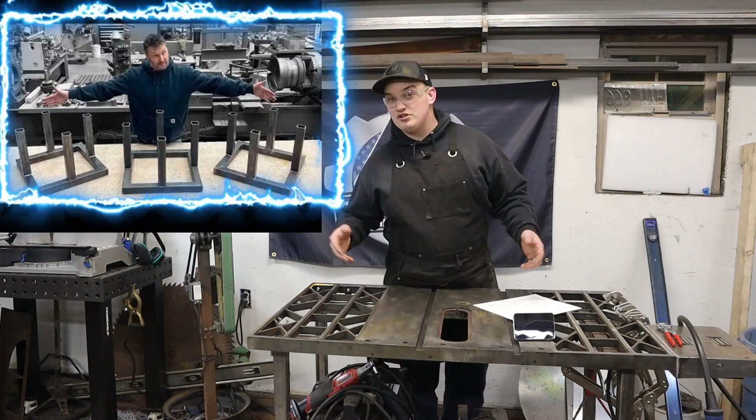Now, a little bit of background on this challenge here. Jason from Fireball Tool did an experiment a couple months ago where he sent out a part that he designed to multiple different weld shops to see what kind of results he got and to showcase the challenges of fabricating things without a fixture table, and specifically his fixture tables that he's designed over the last couple of years.

So I thought it would be fun to do this challenge myself on my budget-friendly fixture table, and Jason himself said, and I quote, 'I'd like to see you guys try something like this,' asking somebody, can somebody just build me a box, please? Just like this. So we're gonna try to cater to that request and see what kind of results we can get.

Now, I'm not trying to knock his fixture tables in any way, shape, or form. I use them at my 9-to-5 job and I love them. They're super great tables. But I also think that there are some budget-friendly options and some techniques that can cater to good results. So I'm gonna show you how I go about doing this, and we'll see what kind of results we get.

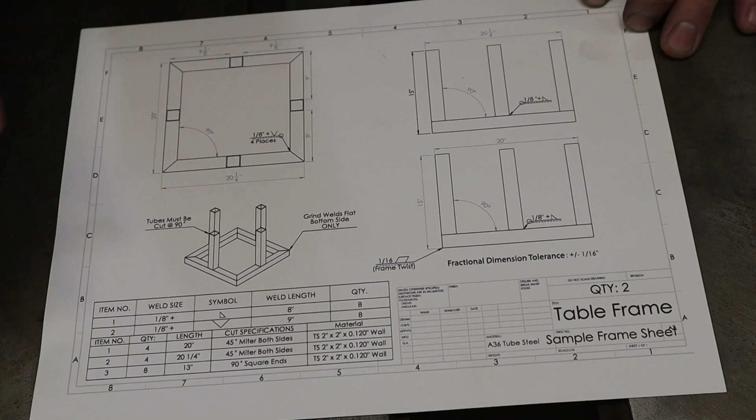Okay, so I printed off the plans here for the challenge. He has these readily available on his website, and we're just gonna kind of go over what they are. So we've got a cut sheet here.

First off, we've got 2x2 120 wall material that we're gonna use. He's got dimensions. So one thing to notice is it's not a symmetrical square. One leg of the table here is a 1/4 inch longer or wider than the other one. So we have a 20-inch length here and 20 1/4 here.

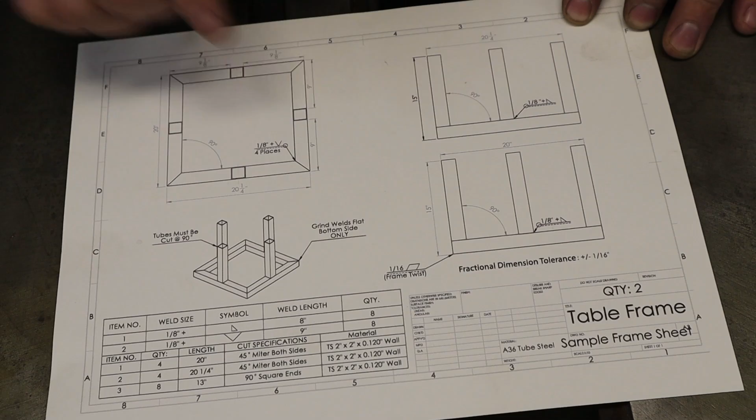Other things I noticed is he has welds called out. So he's got bevel grooves called out for mitered corners. So he also has mitered corners called out instead of just a square end. And then he's got fillet grooves, 1/8 inch plus on both of them, called out on the fillet welds there.

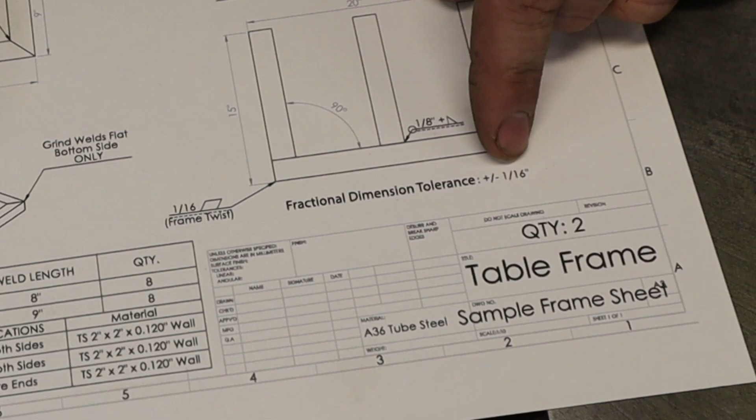The other thing that we notice is we have a quantity of 2, and we have a tolerance of plus or minus a 1/16 of an inch, and that's going to apply to both the squareness and the flatness of this part.

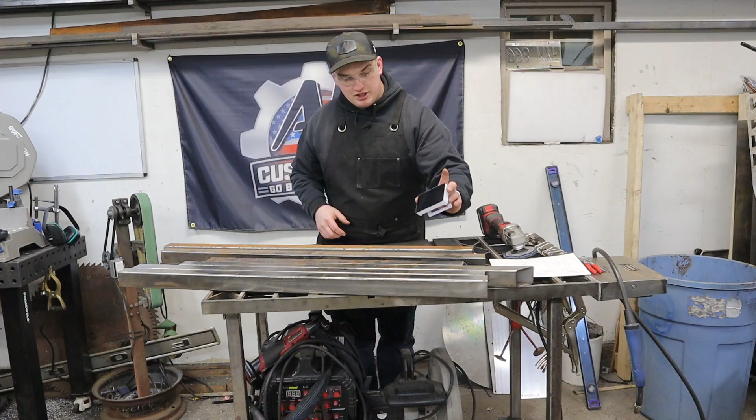Okay, so I got my scrap material here that meets the print's specifications, and we're going to get started with this. One thing that Jason did mention is the importance of knowing the time frame that you're going to do this project in, and I totally agree. Especially if you are planning on making money on a project, the least time possible is going to be the most profitable, obviously. So I'm going to set up the stopwatch here, hopefully it works.

I'm just going to set this in the background of most of the videos so that you can kind of see where I'm at and the progress that I've made at a certain time point. I'm not going to run this video that whole length. You're just going to have to trust me that I didn't edit and cheat.

The other thing that I'm going to do that's just a little bit different than the way he did it is I'm primarily a TIG welder, and I'm going to TIG weld one and MIG weld the other one just to kind of see what the difference is, see what the time difference is, and see if there is any noticeable difference in distortion or anything like that.

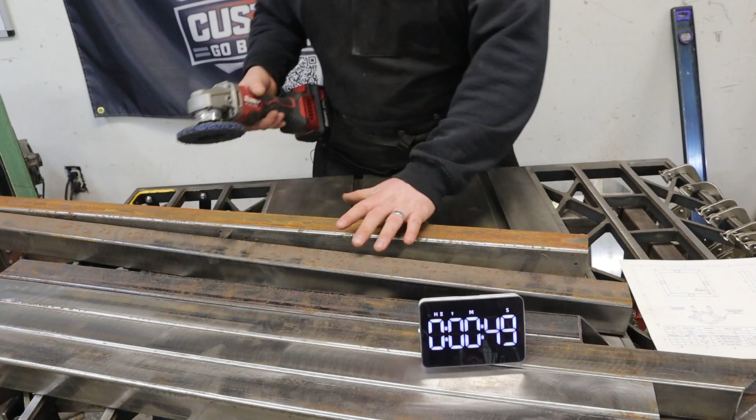So most of my material is clean, but especially since I'm going to TIG weld one of these, I'm going to clean up this last piece here that's got a little bit of scale on it, and I really like these strip discs. They remove the surface rust without grinding into any of the parent metal.

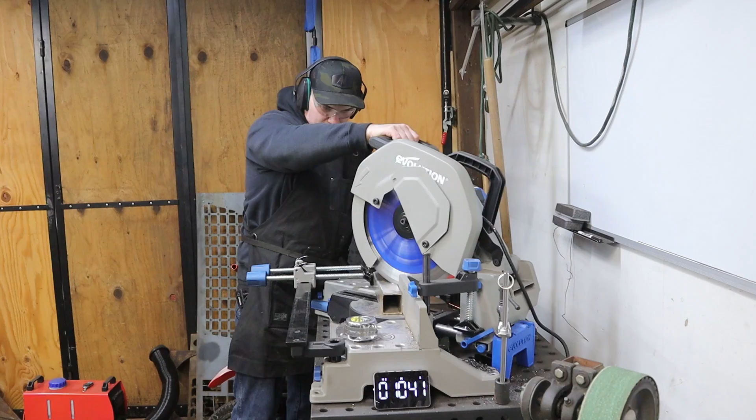So a quick little trick that I use to improve efficiency and accuracy whenever I'm cutting out miters is what I call the miter saw to fence difference. Now, I go over this tip in my top 5 chop saw tips, go ahead and check that out later.

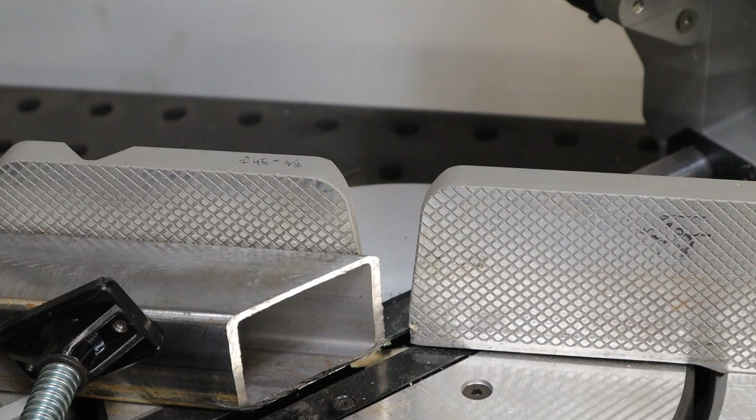But in essence, a lot of times you're measuring your distance, let's say it's 20 inches, and you've got a line, and especially if that tube has a rolled edge on it, it's really hard to get down there and see exactly where that line translates over the edge, especially in this dark corner. So what I've learned is we chop off a quick little sample here. Then once your part is cut, you leave it in the clamp, and measure from the end of your miter to the edge of the backstop.

In my case, at a 45-degree angle, this saw is 5/16 of an inch. I have it written down here just so I can remember that. So if you wanted your piece to be exactly 20 inches, you would measure it to 19 and... that would be 11/16, minusing 5/16 out. So 19 and 11/16 -- let's say our mark was at 19 11/16 -- it's going to be perfectly in line with the edge of your backstop.

So instead of having to look down at the edge, you have a straight-on reference that you can make really accurate. Now, if your saw lands on an odd number like 5/16, which is kind of hard to do quick math with, another way you can do this is do the same thing, do a test cut, leave it in the clamp.

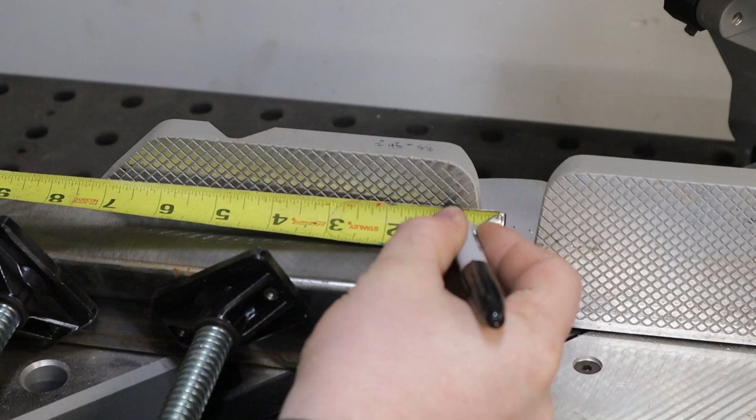Then measure from the end of your miter 1 inch back. Then you know that whatever dimension you are using, we'll run a line at 1 inch and then onto our tube. So in this case, if we wanted our tube to be 20 inches, miter to miter, tip to tip, we would know that we could just make a mark at 19 inches. We could line it up with our mark on the fence. And by doing that test and making that mark, you only have to subtract by 1 inch, which is really easy.

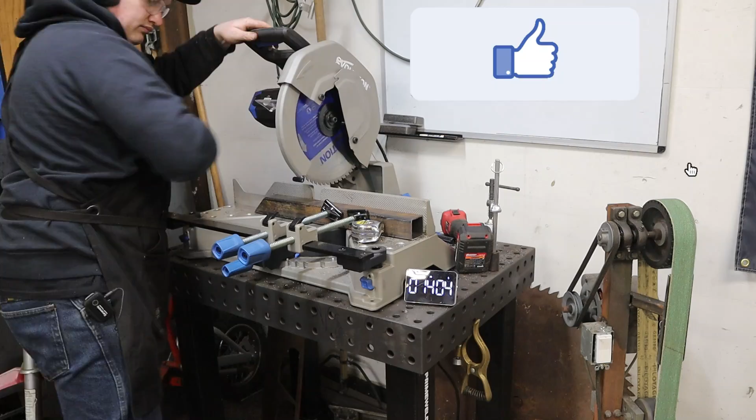Okay, so I got everything cut up and stacked over here. I stopped the timer so I can just kind of tell you about this table and the way I'm going to approach this real quick. It took me about 20 minutes-ish to get all that stuff cut out.

But one thing that Jason brought up, which I believe is very important, is to know the capabilities of the equipment you have. In application with this project, I know that these two wings are within 10 thousandths flatness across the two of them. Then if I get over onto this other wing over here, it bumps up and it's about 35 thousandths difference. So these pieces fall within the parameter of these two wings, so we're going to work off of this corner.

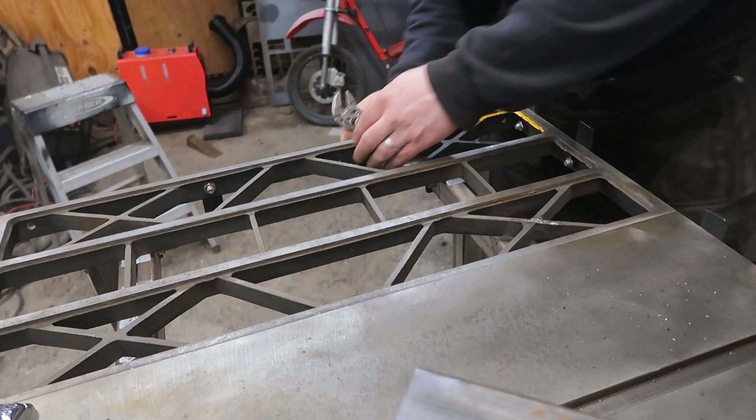As you can see here, I kind of have this corner marked anyways -- this is where I usually base squares off of. What I'm going to do is, like you've seen in my other videos, these are my work stops. I'm going to flip these guys up real quick, and we're just going to tighten them down. These are just little tabs that I have on here with hardware, and this is going to allow me to have an assortment of work stops based off of a square corner.

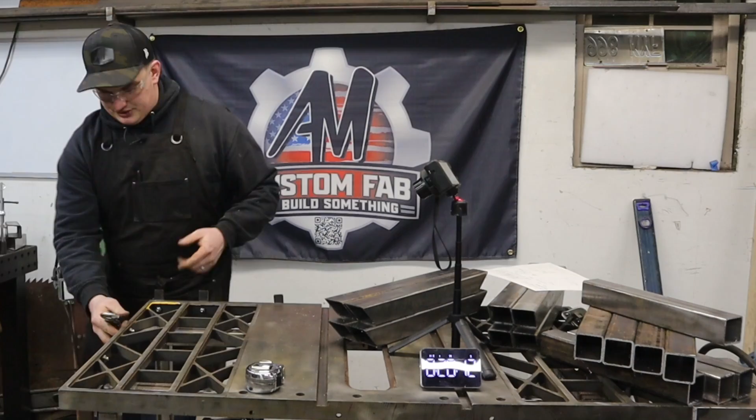Now I also know why I have this corner marked in yellow -- this is the truest corner of the table. So when I have a long square on the corner of this table, it's less than 5 thou of rock in that square. So I know that this is the best corner of my table, that's why I have it marked, just in case I move it around. I always know that this is the best corner to work off of.

Suppose I should start my timer since I'm working again. Sorry about that.

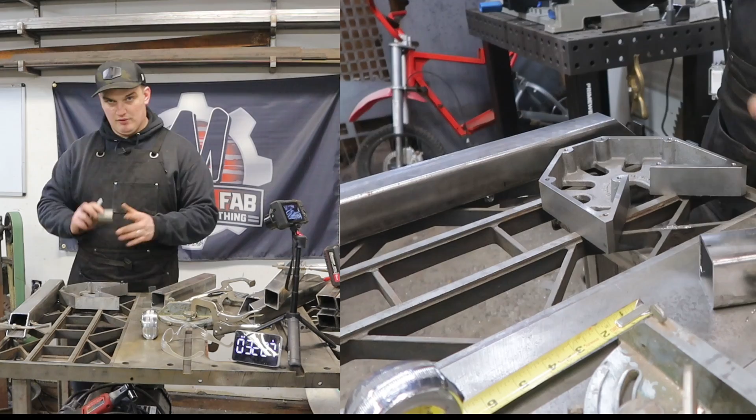And then we're going to throw a 1 inch shim block in here, so that'll make a total of 9 inches based off of the edge of our table here. So drop our shim block in, stick our mega square in there, and then we can clamp our mega square and our shim block to the tab that's on the edge of the table. It wants to pull up on me there, so I have to put a clamp on this side of it.

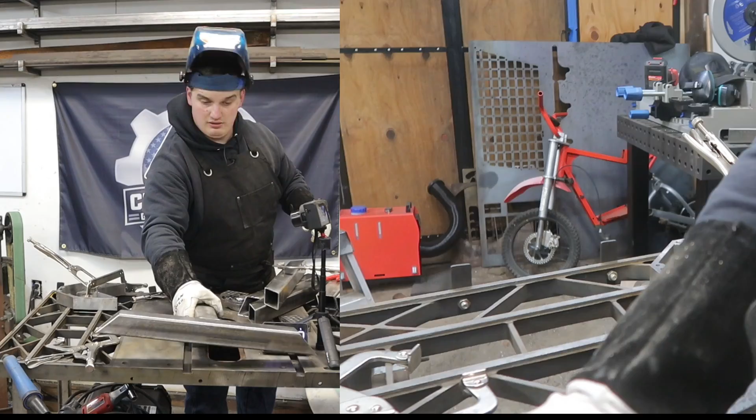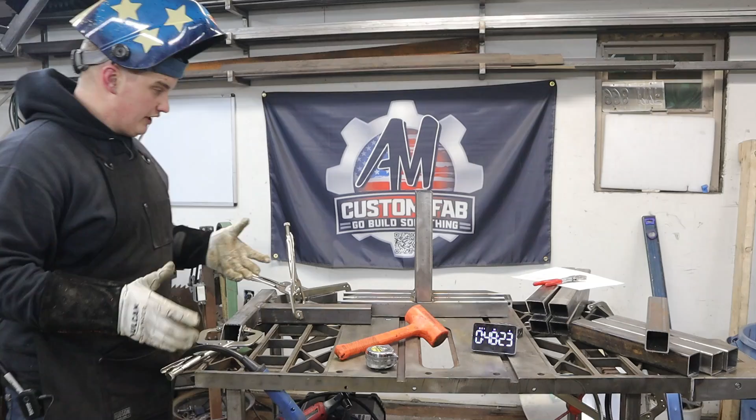Okay, so we're about at the 48-minute mark, 48 minutes and 23 seconds, and I'm going to stop it here. I'm gonna write that down on the table, because this is not my 9 to 5, and it's bedtime. Okay, so next evening we're back at it again.

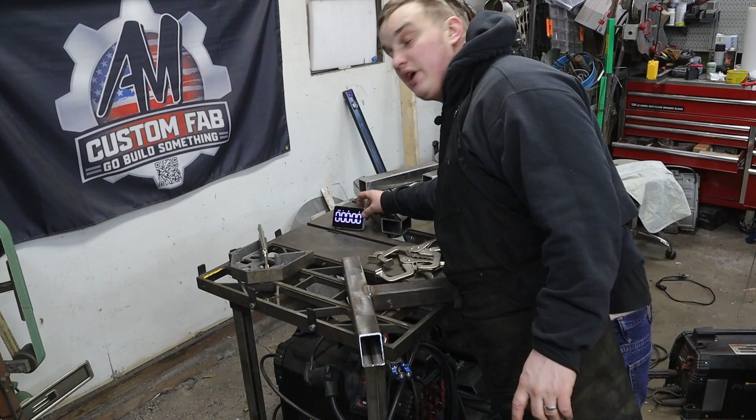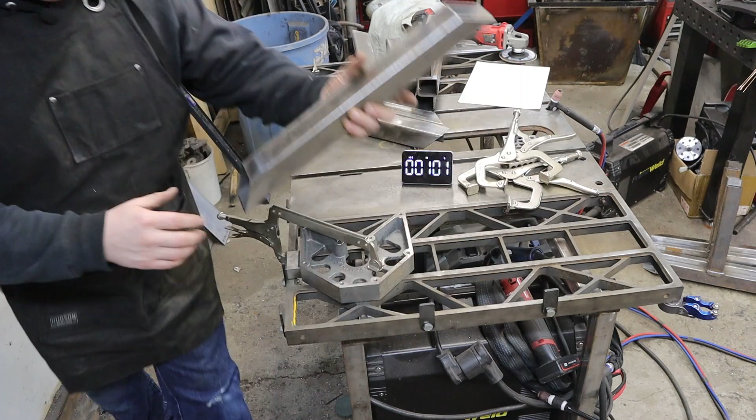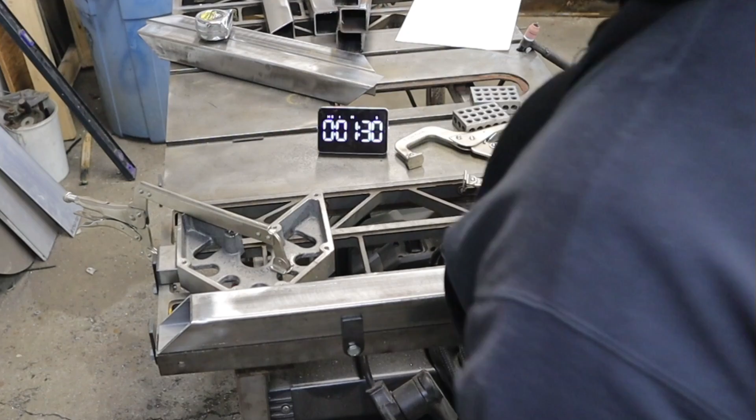We're going to start our timer. We got our one MIG welded up, and since the stop blocks are still set up here, we're going to utilize that and TIG weld that up, and then we'll assemble them together as tables. The right pieces are 20 and 1/4 pieces, so that's what our stops are still set up for. If you didn't see before, I'm basing this whole thing off the corner because I know the corner's square, and then I've got the Fireball shims here along with the Mega Square that is spacing me out that direction and holding everything true.

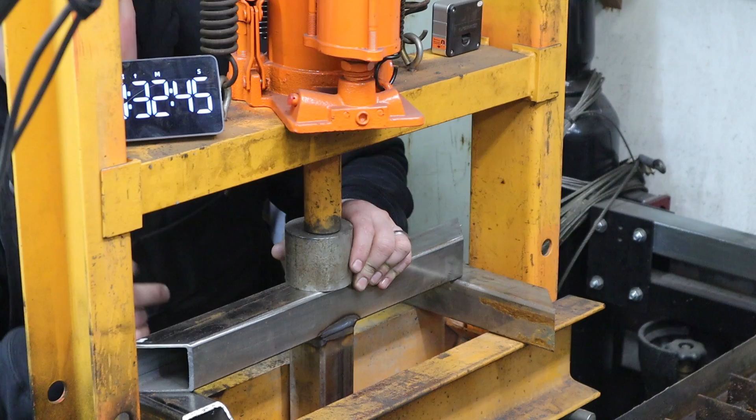And that worked pretty good, so we're just gonna zip through the other 7 of them, and I'll see you in a little bit.

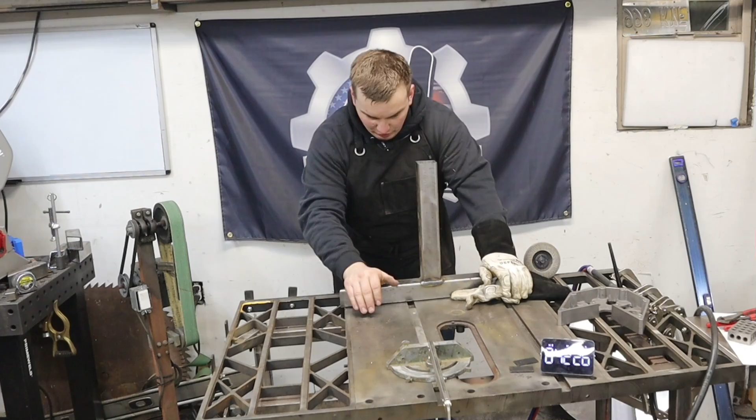Okay, so now that we've got these all flattened out, we've got no more rock on them here. And then if we go and stick our Mega Square on them, we're looking really true. So, liking that.

Now we can set up our table to square these out.

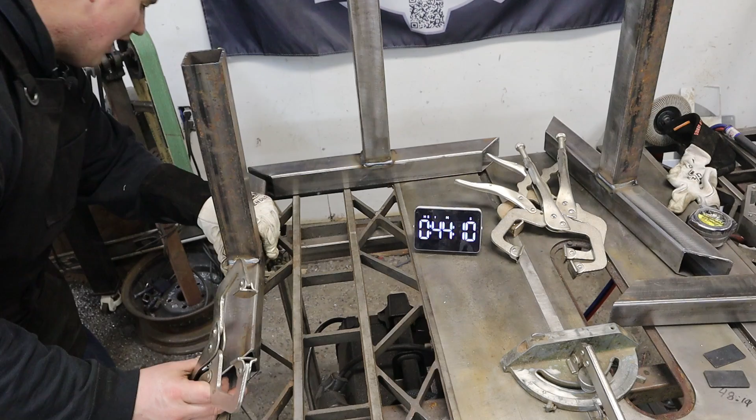Get our clamps, they're hanging on the side of the table over here. We're going to utilize these side tabs again, using the table itself to get right in the corner.

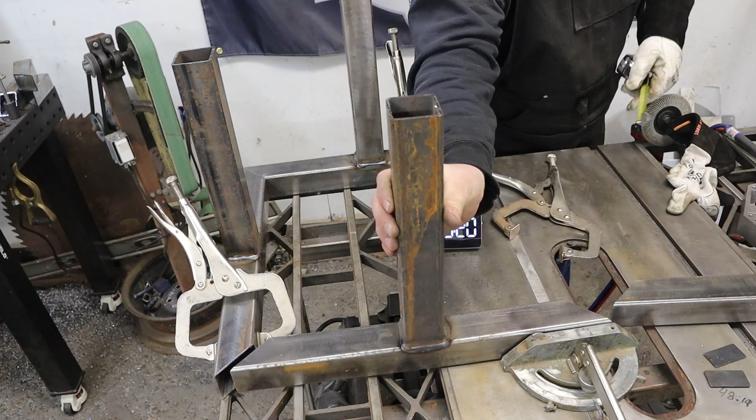Okay, so this end one here, I'm going to clamp it up against the miter gauge. And then this guy should slide right in on this side. But it's not, I put the wrong one in the wrong spot. And because I know I set that at 20 inches, I knew something was not right as soon as I stuck it in there. So, stick this guy over here.

Okay, so now that I've taken some measurements and got everything pretty much squared up, I'm noticing that some of these legs are wanting to kind of lean in on me when I have it all clamped down square. And I don't have the towers like Jason has on his table to be able to build off the table and up. Now, I could potentially take one of these wings and stand it up, square it up, and lock it down, and that would resemble the function of one of those towers.

But what I decided I'm going to do is take some raw material here, got some scrap pieces, and we're going to cut these down to fit and meet the parameters of the inside dimension of these legs. One direction we got 16, because we got 20 inches the other way, so minus 4 is 16. The other way we should have 16 and a quarter. So we're going to cut these down real quick, and we'll clamp these in between directionally, and that's going to help hold those tolerances while we weld that out.

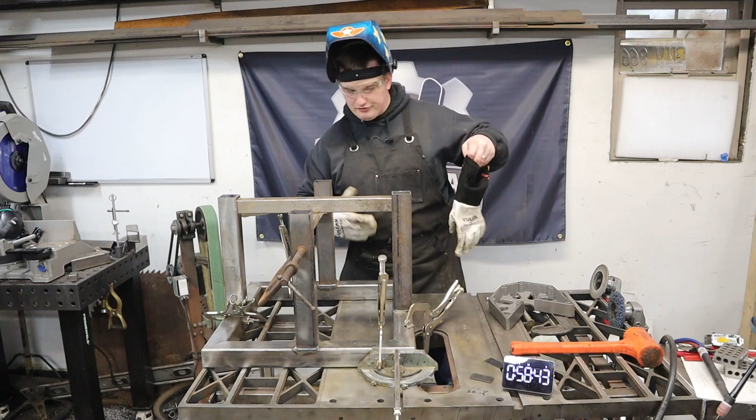This direction is our 16, which is this guy. Stick it in between the tubes here. And then this direction, confirm my length is proper, 16 and a quarter. Stick that one in here. I'm gonna go through and tack all the corners first, and then we'll go through and weld as much of it out as we can with it all fixtured up.

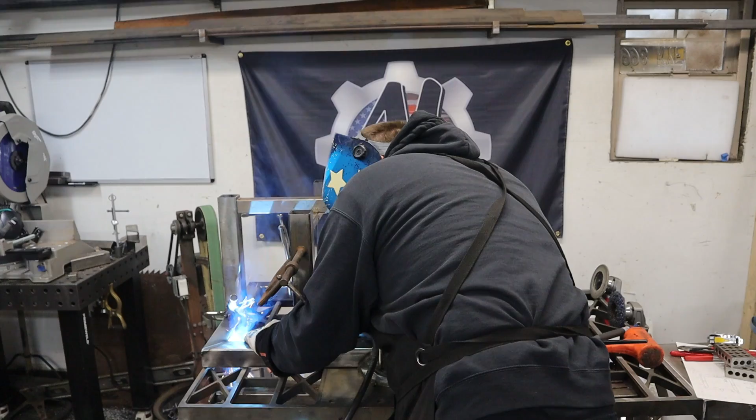Okay, so they definitely relaxed a little bit after welding because these things are not tight. If anything, they went out a little bit, which I prefer because you can always stick a clamp on them and kind of suck them in once you're done with that. But we also need to weld the bottom side, so I'm not going to suck these in until I weld the bottom side also, because it could shrink back that other direction once we start putting weld on the opposite side of this. So we'll check that out once we get to that point.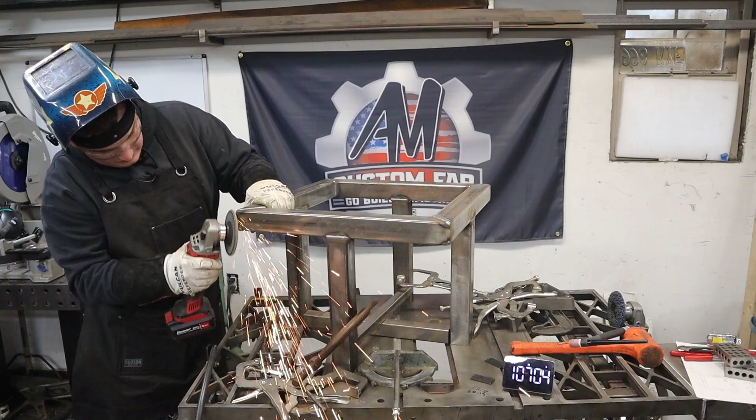So just a quick example, this is kind of the profile that I'm looking at to grind it down to. See how I left a little flat there so that we have room to fill that in. And this is what it would look like if you left it all sharp, and that weld's just going to kind of sit on top there, so it won't be as strong and it won't look as nice.

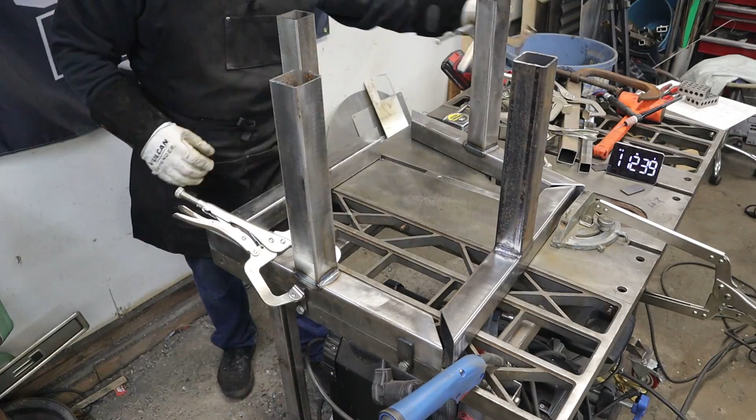Now if you wanted to go the extra step, the other thing you can do, if you have enough clamps, is clamp a piece of material to the side of these two tubes, and that's going to help ensure they're straight across or lined up, just in case you were slightly off center on your tube in relation to the miter. That's going to help line that up, but I think we're pretty good. We'll find out once we get it welded together.

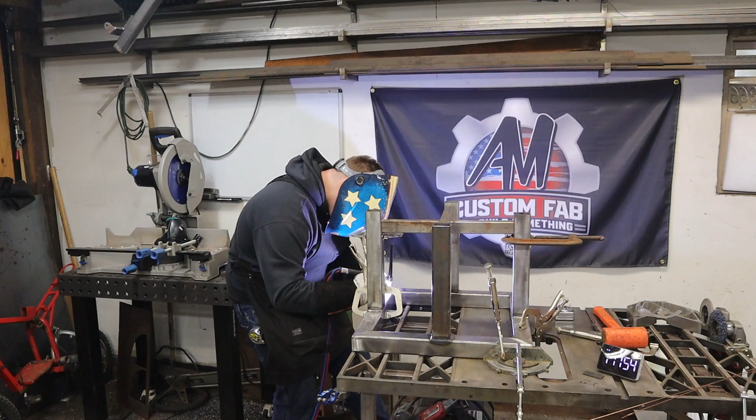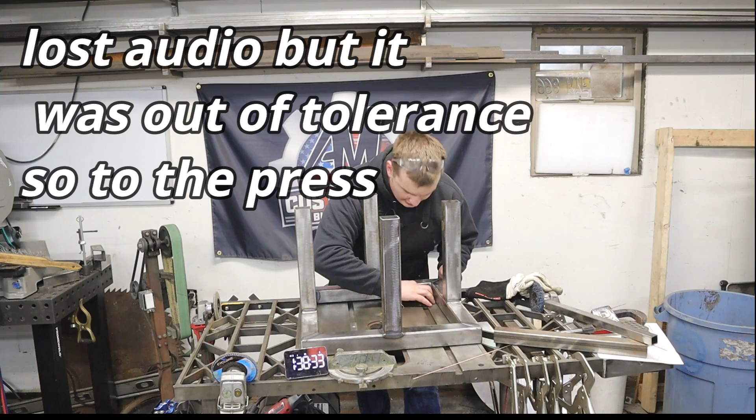These are our high sides. You want to push that down. Find a longer, more robust piece of material here. It's got some junk welded to it, but it should serve the purpose. Stack some plates on top of this one and let her rip.

I don't want to go too far, but I know we're going to have a little bit of rebound in the material. Let's see what that did. We are good and flat now. We've got no teeter in either direction. Feels really good.

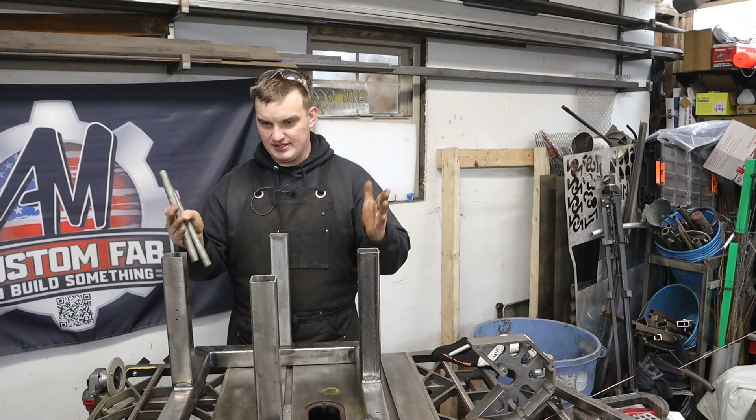Move it over here on this part of the table. I'm going to do that to the other one. We're going to clamp it down real quick, and then we're going to see about addressing the squareness of these and see if we can't true up the relation of these legs to each other.

Okay, and that did it. We got the teeter out of the MIG welded one too. It's pretty flat. There's a tiny teeter in it. It's a tongue twister, but we can't even fit the 32nd Fireball shim underneath of it.

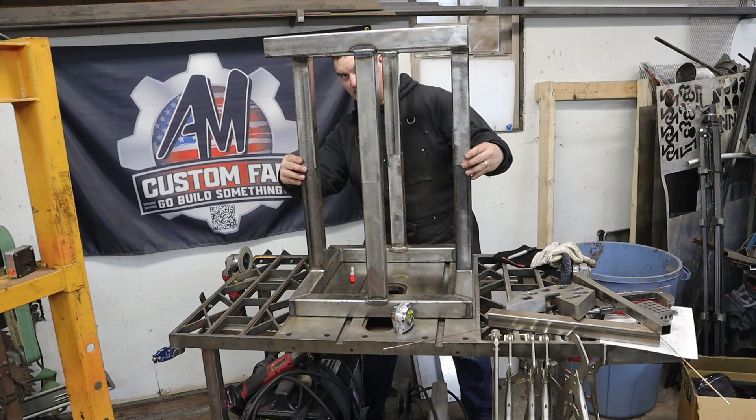So we're well within tolerance there. Now we just need to figure out which one of these guys is not quite square. Now those not being flat also could have been what was taking us out of some of our tolerance. So we'll check that out as well. Oh yeah, that's what some of it was.

So let's see what we are as far as distance on these guys. This is our 16, so we're just a little bit fat on this bottom one, so we can squeeze that in and bring it a little closer. Check these ones, we should be 16 1/4 this direction. The MIG welded one's right on that direction, and the TIG welded one is sucked in that direction a little bit.

But overall, this one definitely needs to be addressed. We're close to an 1/8 inch out on that one, but the rest of them are within 1/16 inch squareness now. So that's something else to consider, this thing not being flat was contributing to the squareness of these legs. If I would have messed around with squaring these legs up first, I don't know if that would have made these flatter and vice versa, or it could have accentuated the problem.

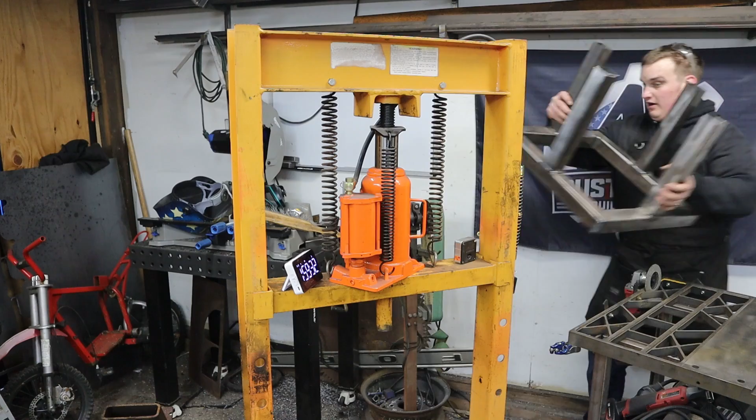But I'm going to put this guy in the press this way, suck it in just a little bit. Go one more time. Stick the TIG welded one back up here, see how we're looking again.

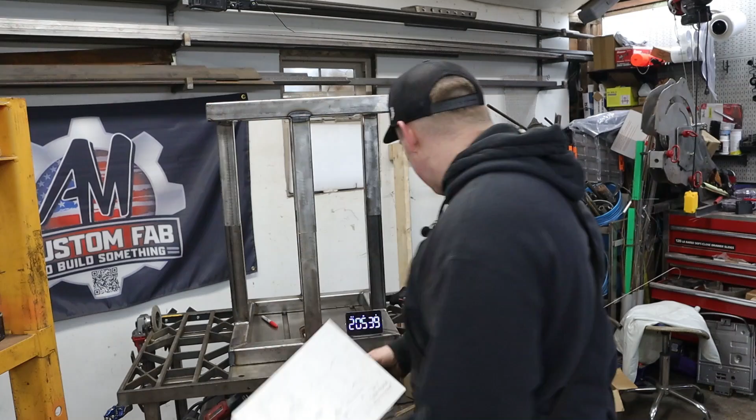We are pretty close. Okay, so final results. I'm going to stop the clock here, and we're at 2 hours and 5 minutes on the second clock, and then the first clock we had 48 minutes. So we're right around 2 hours and 50, almost 3 hours to get both pieces to the point that they're at right now. As we remember, one of them was TIG welded, one was MIG welded. They're both done on the fixture table.

Now, as far as the tolerances that we landed at, all of our dimensional tolerances are within tolerance. Most of them are even within a 32nd, on the dimensions here, our flatness on the bottom and the top. The only one that I think we are borderline not within tolerance is the squareness of these legs, and it was definitely humbling.

It was tricky. This was a really good test that Jason did. It is super tricky to keep these things square in the middle of this tube and match in the relationship to each other. So with these guys sitting on here, you can kind of see we have just a little bit over a 1/16 of an inch.

Now, I could probably get that out. It would probably take me another half an hour of fiddling with them, but I think I've experimented to the point that I needed to. I believe this was just super fun and informational. I definitely learned a lot on how I would approach a job like this coming in the door, but it also shows me what the capabilities of my table are here.

So this was definitely a good learning experience. As far as the welds go, I wouldn't say they are my best welds in the world. I did more of a production weld with them because the whole premise of this was kind of making money, but I'll show you some anyways, just to show I was going for production quality, not necessarily super finish quality. So as you can see, it's a decent TIG weld, but not quite up to my normal standard. I'm primarily a TIG welder, and I pride myself in being fairly good at that.

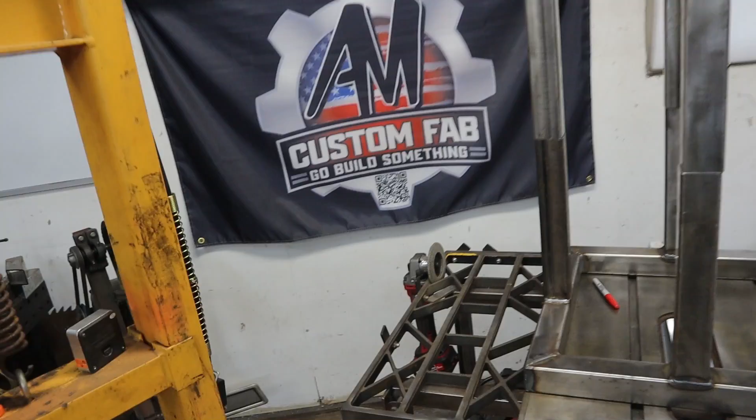And then MIG welds are definitely production welds as well. They're not super uniform, but definitely within spec, and that looks like a hole on camera, but it's not, it's just some silica. But we're definitely within spec and not globular and unprofessional, I would say. I feel like we're within the parameters because I didn't see any finish stipulations on these drawings as far as the type or extent of finish.

The only other thing I'd probably do before sending these out is on the MIG welded one, take my little angle grinder and knock off those BBs and clean up any sharp edges so it's good and presentable, and then I think I'd ship them out the door.